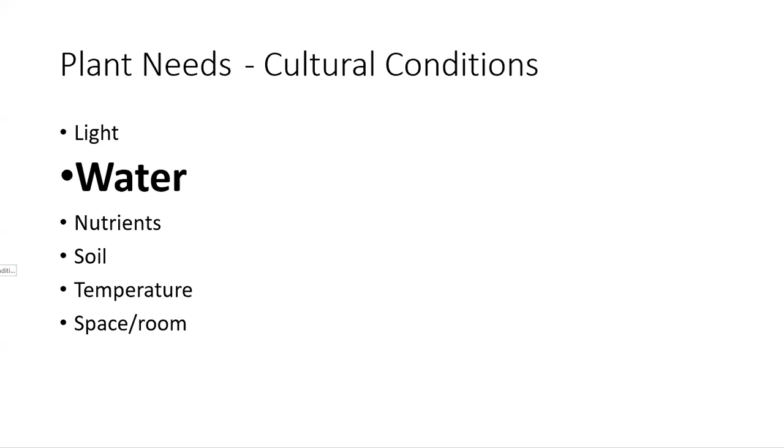So obviously, plants need water. If there is a native planting or a naturally occurring planting, those plants are adapted to the climatic conditions that they are in, and therefore they're also adapted to the amount of water that they receive naturally. So we've talked about Mediterranean plants, and there's California natives in their own respective independent regions within California in their own climatic areas. Once they're established, if they're in a planted landscape, they don't need supplemental water at that point.

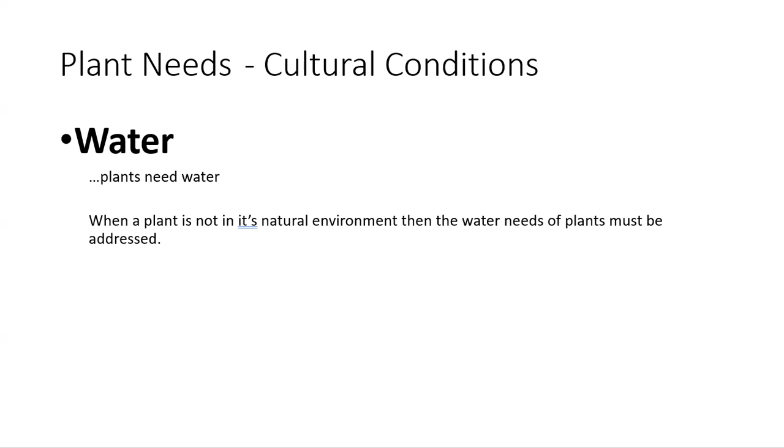If a plant is not in its natural location, if it's used in a landscape and it is not a native to that region, then it will typically need supplemental water to get established, as well as to continue to live and thrive. So how do we do that? Of course, we do it with irrigation.

So we're going to go through irrigation systems, irrigation terminology, hydrozoning. We're going to look at California water issues, soil water plant relationships, and irrigation system scheduling, which can tend to be a bit of a mystery for people. There is a really defined way to address irrigation scheduling, but it is sort of an area and a career all on its own.

There's lots of manufacturers out there. I don't have a preference for Hunter or Rain Bird or Irritrol or Toro or any of the companies. My opinion is whatever the best product is for the situation that you're dealing with, that is the one that you should use. But Hunter does have great videos on irrigation.

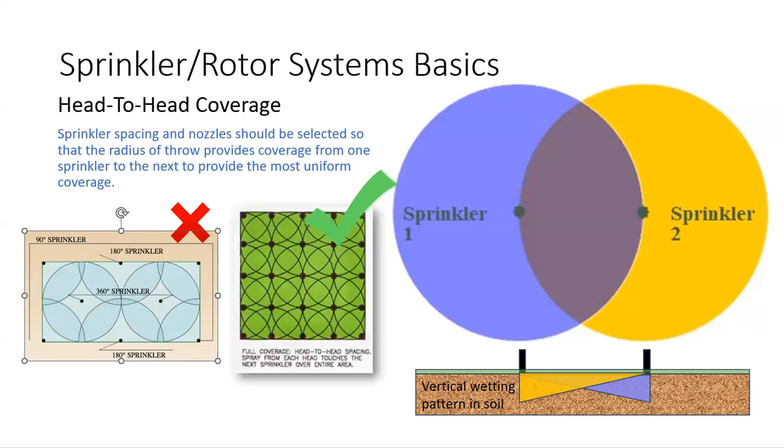Now, with this head-to-head coverage, there's a couple ways to achieve it. There's square spacing and there's triangular spacing. So square spacing is typically what we see on smaller areas, okay? And they can be really large areas. We see this installed in large lawns. The triangular spacing, you can see that it's just a little bit more efficient.

Okay, so in the square spacing, you see that you've got these overlap patterns here, right? So you have this overlap here, but this right here, from this sprinkler, the arc is 360 degrees. It's actually hitting 4 other sprinklers, but it's not getting close to this sprinkler, okay? Just because of the square spacing. Sprinklers throw a circular pattern, and so it can't make it all the way out to here.

If you switch to triangular spacing, you actually get much closer. So you get more uniform coverage, and so it's used in really large areas. But once you get close to any kind of straight line, you end up with a bit of an awkward wetting pattern, right? Because you'd need a sprinkler here, but the overspray would be a little bit awkward.

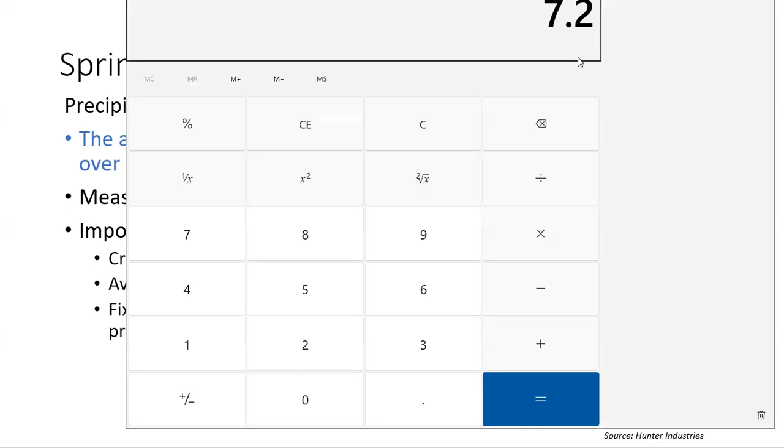So if we relate that to rain, in California in general, if in a 24-hour period we get 1 inch of rain, it's raining pretty hard. That's a heavy precipitation rate. If you relate that to a sprinkler, that's what sprinklers are replicating. And this is a pretty high precipitation rate compared to a heavy rain or downpour. With this sprinkler on for 24 hours at 0.3 inches, we multiply that by 24, that's equivalent to 7.2 inches in a 24-hour period.

So precipitation rate is really important to understand because we need to know how much water that system is putting into the ground. The really common question is, how much do I irrigate? I get this question a lot. What should I set my system to? How do I schedule my irrigation system? The answer is it depends on a ton of different factors that we'll get into in a couple minutes. But this is a very important one.

You have to know the precipitation rate of a system in order to accurately replace the amount of water the plant has lost through transpiration. Remember, we've talked about transpiration. Transpiration is measurable, and we'll get into how it's measured. You also have to replace the water lost from the soil through evaporation. The really key factor in that is understanding the precipitation rate.

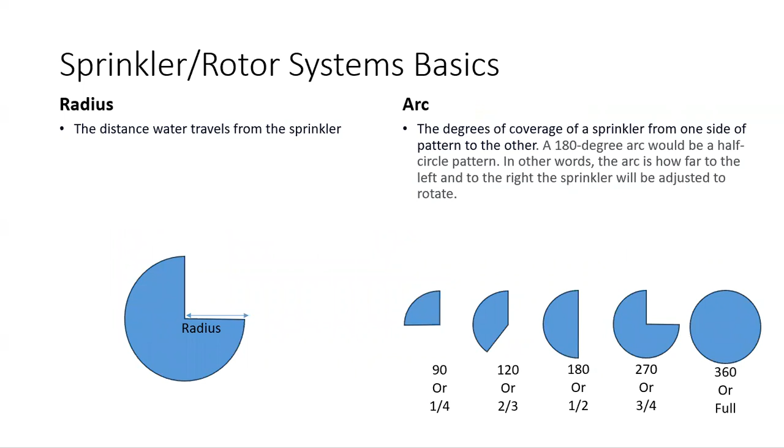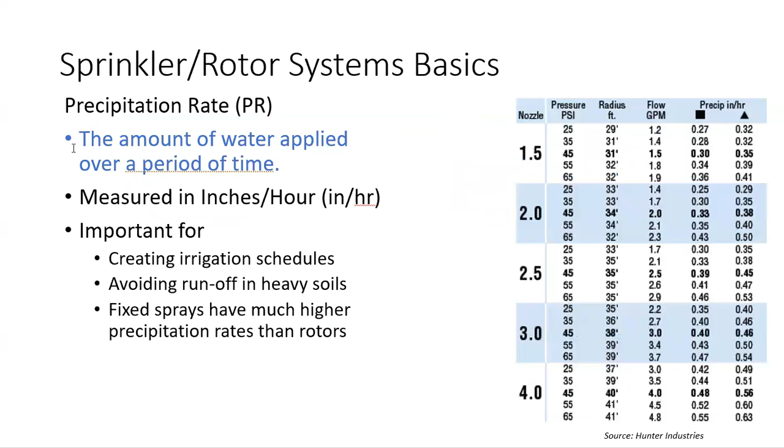Okay, so key terms: radius, arc, square spacing, triangular spacing, head-to-head coverage, precipitation rate, and match precipitation.

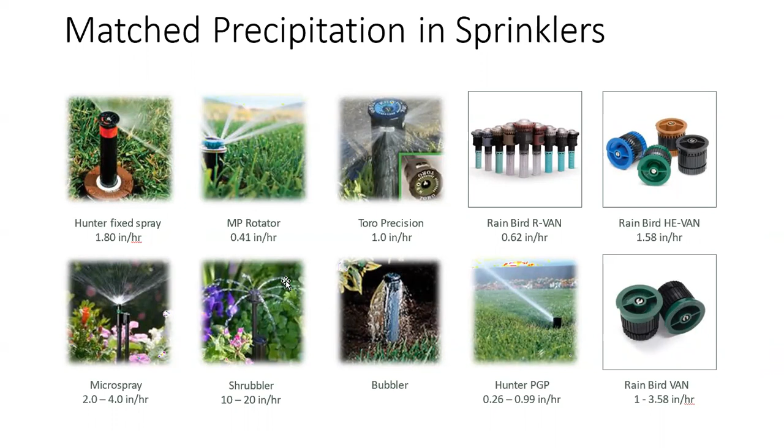that happens to this. Overspray is water that lands beyond the planted or irrigated area. When overspray lands on sidewalks, drives, or other hard surfaces, it can and does empty into the streets and local waterways. So both of these are not desirable whatsoever. Okay, these are typical issues associated with sprinkler systems, with systems that we throw water through the air to land in a desired area. But things aren't perfect, and so typically we have runoff and overspray.

Now, low volume systems, drip systems. Drip systems is a type of micro irrigation system that has the potential to save water by allowing water to drip slowly to the roots of plants, either from above the soil surface or buried below the surface. So in this case, you see we have an emitter that's on a poly tube, a drip line, okay? And this emitter acts like the nozzle. You select this emitter for the gallons per hour that it puts out, okay?

This one here, this one's called a point source system. This one's called an inline system. This one has built-in emitters, and we're gonna go through each one. So drip systems reduce overwatering. They avoid irrigation runoff. They apply water directly to the root zone. They minimize evaporation, and they can be line source or point source.

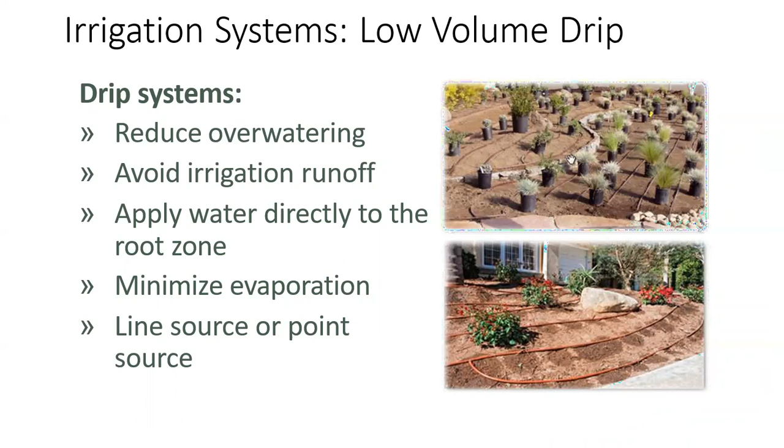So the difference, and you guys saw some of this in the video from Hunter, this is sort of the system that they go through, right? We've got a meter, a point of connection, a shutoff valve, a backflow prevention device, sometimes a pressure regulator if needed, a master valve, a valve, and in this case, it's going to a rotor system. So main line to valve becomes lateral line to a pop-up rotor, all the same from the same valve. In this case, it is a pop-up sprinkler system with MP rotators.

This right here is the drip system. Okay? And it's important to understand that with drip systems, we need a couple extra components. They're lower volume and lower pressure, and so we need to reduce the pressure downstream of the valve and have a filter, because the emission device that the water is actually going through, those are very small orifices. So anything that comes through this mainline system, any grit, any debris, etc., and it does, right?

If you've ever lost pressure or flow in like the bathroom or the kitchen sink faucet and unscrewed the nozzle on it, you can see built up stuff in there, right? Sometimes it's hard water buildup, but a lot of times there's just broken up debris in there. Water, stuff like that comes through our systems all the time, and it comes through our irrigation systems as well.

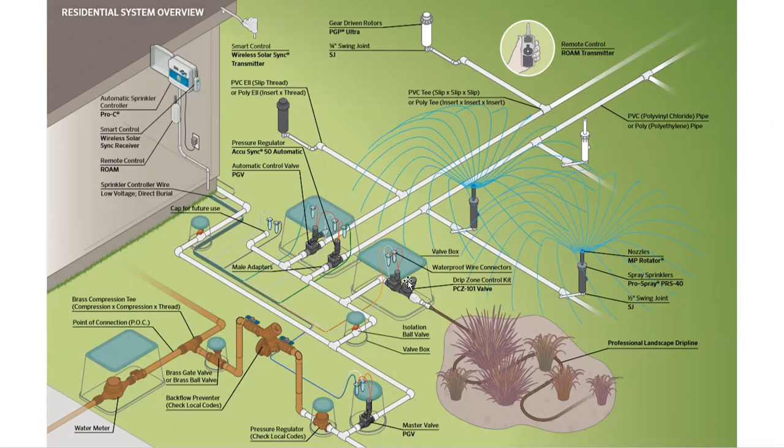So our point source drip systems, they're good for sparsely planted areas. So if you have a great distance between plants, it's good for that. It's very flexible. The challenges to it, though, are that there's lots of parts, and so lots of parts that can break. And it's very difficult to determine an actual precipitation rate, because each one of the emitters is putting out a certain gallons per hour in the area that it's dripping onto.

But it's very difficult to put this system together and then to be able to say this system puts down 1 inch of water per hour, okay, because of the high flexibility in the system, and that you can stick emitters anywhere, okay? Now, they're good systems, but again, the downfall to them are that there's lots of parts that can break, and it's very difficult to determine an actual precipitation rate. So scheduling it becomes very difficult.

Now, I put these pictures here, and you can see the actual layout. This is polytube. This is a 1/2 inch line, goes to 1/4 inch line, and then goes to the emitter. These are the pictures that you typically see in big box home improvement stores. Okay, we all know them, Home Depot and Lowe's.

And it's very misleading. Okay? I sort of think that they need to take these off of their pictures in their marketing material. You never put a system together like this. So first off, you see that this 1/4 inch tube comes off of the 1/2 inch line at an angle. You never want to do that, because if somebody steps on that, it's going to break. And you see this sort of popped up here and water dripping off, same thing.

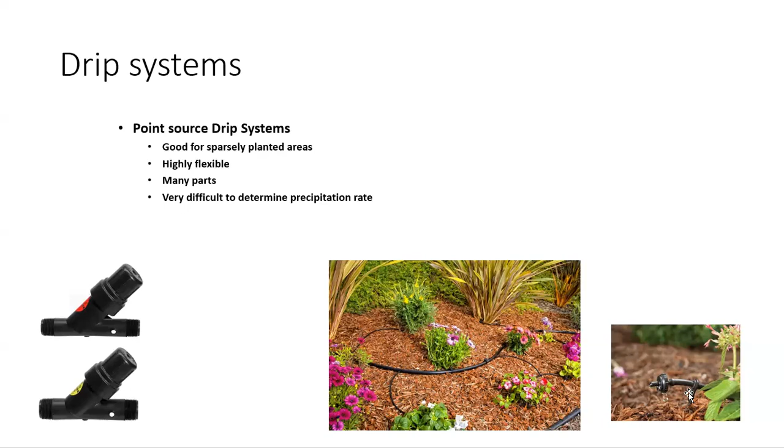You do not want this above grade. I think that they do this so that you can see how the system's put together, but this is the wrong way to do it. You need this drip line under the mulch. You need the 1/4 inch coming off of it parallel to the ground surface, and then these should be installed again under the mulch and not popped up at all. This is sort of a disaster waiting to happen.

Now, the other type of drip is an inline drip system. These are really good for all landscapes. You can use these on lawn as subsurface, as you can see in the diagram here. They are highly flexible. There's very few parts, and it's very easy to determine a precipitation rate.

Okay, so here, instead of an emitter or multiple emitters going to each plant itself, you uniformly irrigate the area with drip emitters that are built in at a certain inches on center, and the rows spaced at a certain inches on center. And what determines that is the type of soil. Right, so if we pop back to this, in a heavy clay soil, you would have further row spacing and further emitter spacing so that you have a lower precipitation rate.

With sandier soils, you'd have rows that are closer together and emitters that are closer together and higher flow rates because that soil can take the higher flow rate without saturation and runoff. Already went through all that. Perfect. So here you can see in this diagram,

so there's charts that you can follow here. So if you know the soil type you're working with and what you're actually irrigating, lawn or shrubs, ground covers, etc., it will tell you if you're irrigating shrubs and ground cover at grade, in a clay soil, you should use a 0.26 gallon per hour emitter inline tubing. The spacing on the emitters should be 18 inches.

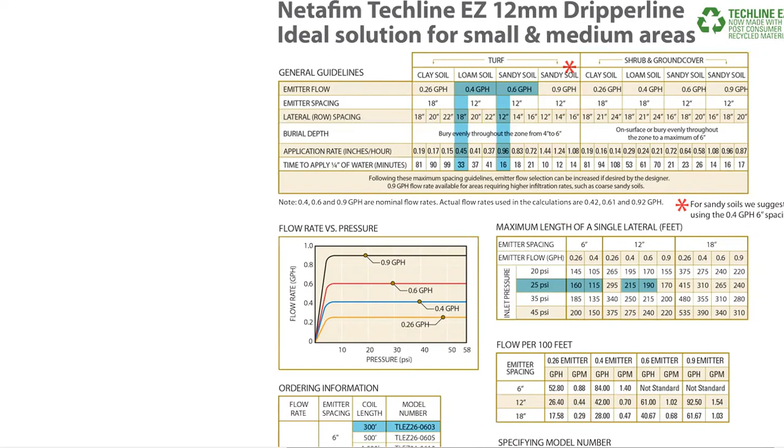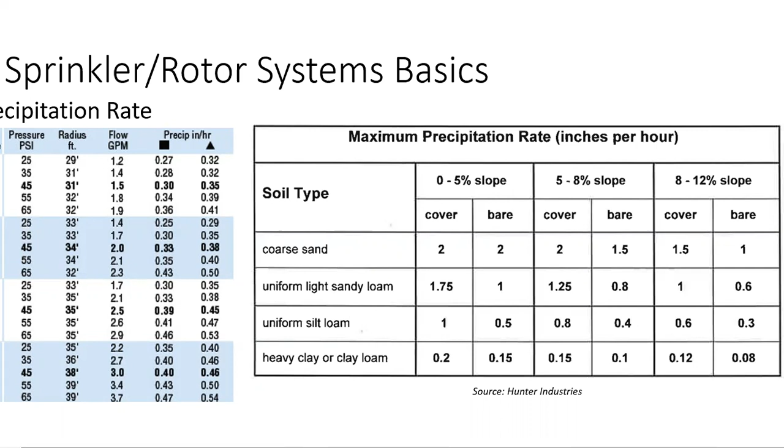The row spacing should be 18 inches. And therefore, your precipitation rate or application rate would be 0.19 inches per hour. And if we relate that back to our heavy clay soils, that 0.19 is a pretty good spot to be, right? Get back to normal here.

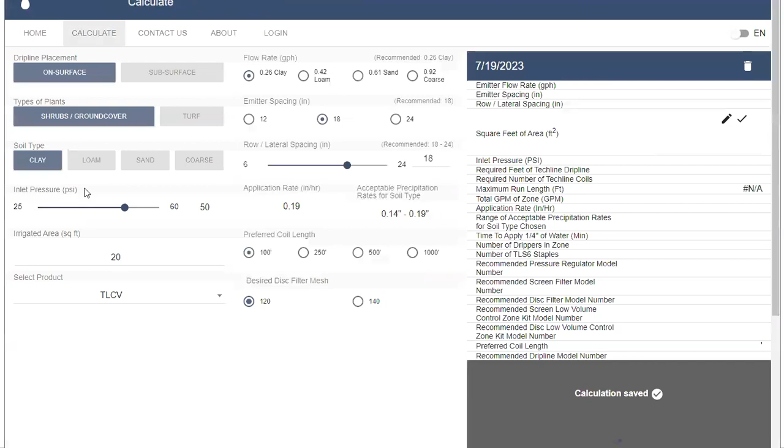Now, so there's charts for this, right? And you can see that using inline drip systems, you can get to a known condition. There's this calculator. Okay. Click on this. This is the link. I'm just going to bring it up. It brings you to Netafim's Techline calculator. Netafim is another irrigation manufacturer. If you go to calculate, so please do this, you can go through certain conditions.

So let's say that I have an on-surface system for shrubs or ground cover. I'm in a loam soil. My pressure, remember we have a pressure regulator, my inlet pressure is 30 PSI. My square footage is 500 square feet. Go ahead and just keep the Techline check valve. It's a certain product that they make. It's kind of the best one.

What it does when you put in all these conditions is it gives you the flow rate of the system that you need to use. Okay, it gives the flow rate. So each emitter puts down 0.42 gallons per hour. It's recommending that our emitter spacing is 18 inches on center. It's recommending that our row spacing is at 18 inches on center.

So if we zip this back to here, that would be our emitter spacing at 18 inches on center. So you can see that there. So along this line here, every 18 inches, there would be an emitter. The row spacing, so one drip line, next drip line. So the installed row spacing would be at 18 inches.

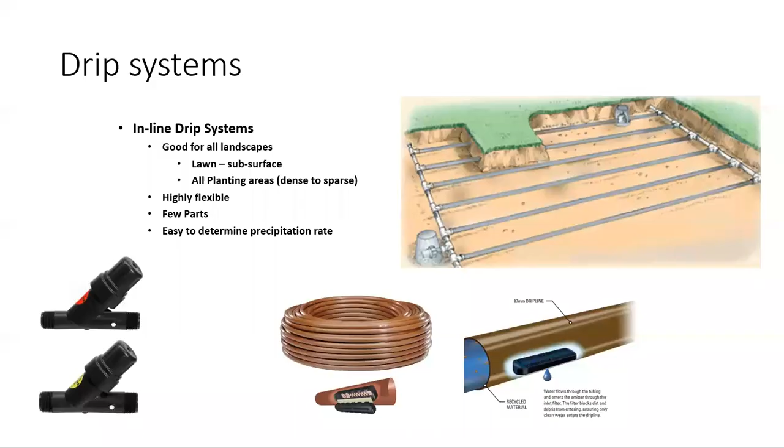You can get this product in 100-foot coils, 250-foot coils, 500-foot coils, 1,000-foot coils, and then it's telling us some other stuff which you guys don't need to be that concerned with right now. The other nice thing that it does tell us is that the time to apply a 1/4 inch of water is 50 minutes. The other thing that it tells us by going through this is through that system, what the flow rate is. Okay, so going through that lateral line to the first emitter is going to be 1.55 gallons per minute.

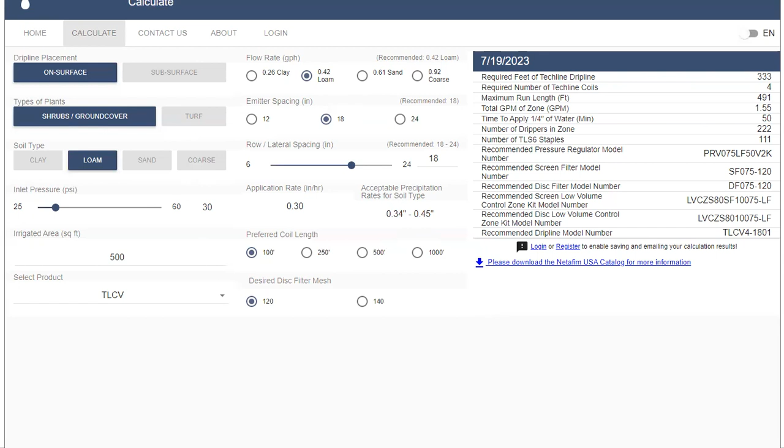Okay, now that's an important thing to know for irrigation design, because then you can determine what the pressure losses are. But again, you really need to take the irrigation design class to really understand what that means. But there are these calculators out here for this sort of thing. So this is how you use them. And this right here is the link to get there.

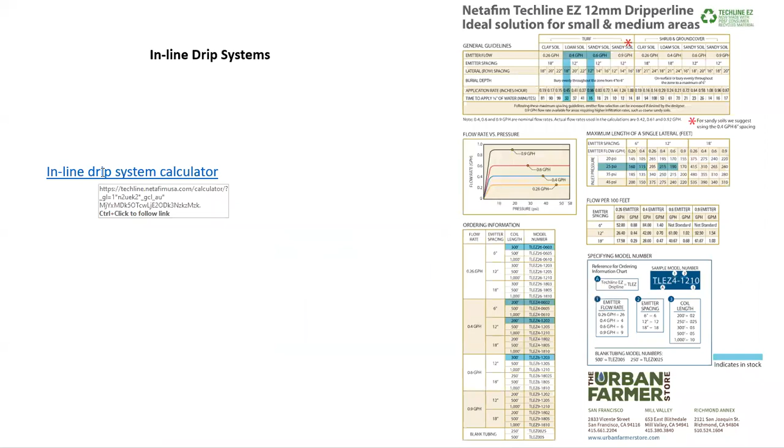Now, irrigation audits, it was mentioned earlier, an irrigation audit is used to collect and provide information about a current and planned irrigation system operation and overall condition of the system. So by design, these systems operate in a certain way. In reality, they're always a little bit different. So we use irrigation audits to figure out what actual precipitation rates are.

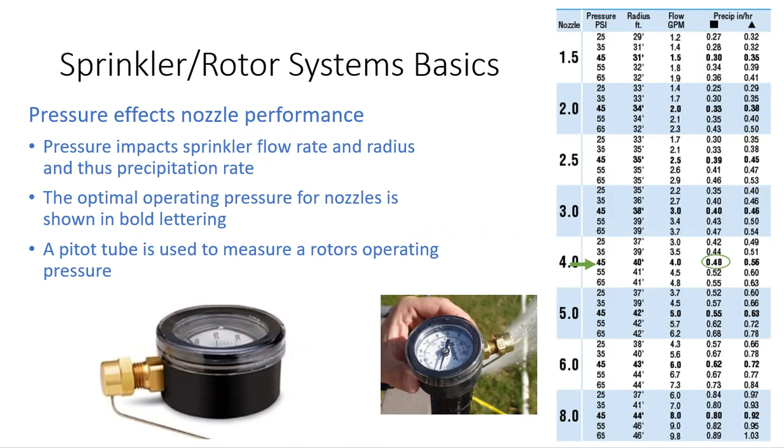Okay. This is a picture of somebody doing a catch can test where you lay out a bunch of, they're called catch cans. This is what they look like. And they run the system for a certain period of time. They measure the amount of water that falls into the catch cans, do some calculations, and from our irrigation charts, it tells us it should be about 0.48 inches per hour under these conditions. But again, the reality of it is it's going to be a little bit different. So irrigation audits are very, very helpful to be able to figure out exactly what the uniformity of the system is and the precipitation rate is.

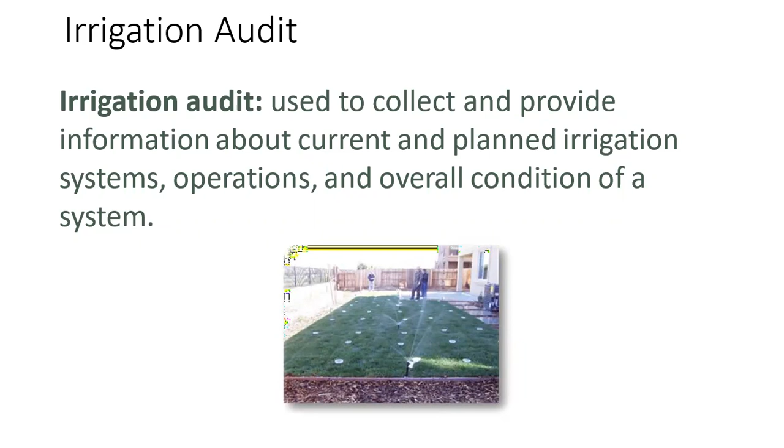So these include a visual inspection, an evaluation of the distribution uniformity, so how well that system performs. So if it's not perfect head-to-head coverage and not matched precipitation rate, then the distribution uniformity is going to be really low. It's going to be poor distribution uniformity. With the irrigation audit, this is one of the most important things, the actual precipitation rate. You can also determine the landscape's watering needs. We'll go into that. And then we use it to review and develop an irrigation schedule.

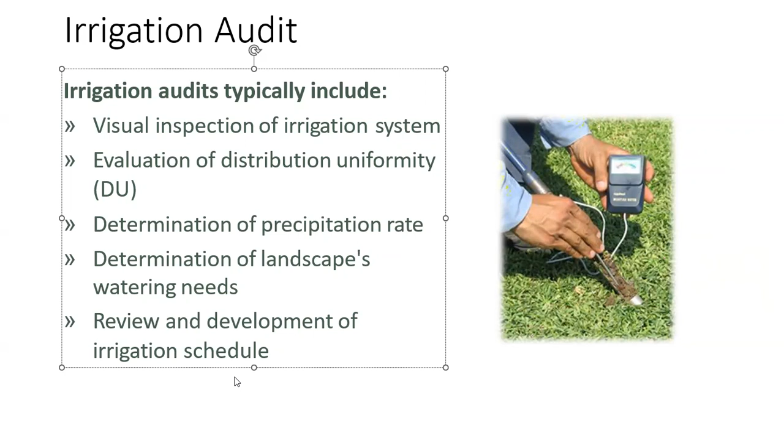Biannual audits are recommended, and with some projects, some landscapes, it is required. And it is a requirement for a certified landscape for certain projects to get final inspection. There are projects that require an irrigation audit. Now, the audits need to be conducted in a manner consistent with the Irrigation Association Landscape Irrigation Auditor Certification Program or another US EPA WaterSense labeled auditing program. QWEL is one of those, Qualified Water Efficient Landscaper.

These are programs and exams that you can take to become a certified landscape irrigation auditor. This is a great certification to have. I do irrigation audits frequently, and they're going to be required more and more. So if you're interested in this, look into these programs, but also understand that Hort 110, the irrigation design class, really helps to gear you towards that and understand it.

So the thing we're trying to figure out with an irrigation audit is the distribution uniformity. This is a measure of how uniformly water is applied to the area being watered. It actually expresses a ratio or a decimal to avoid confusing it with efficiency. Okay? And again, in Hort 110 we'll get more in depth on this stuff, but typically it's expressed as 0.81 or 0.75, as opposed to 75% or 81%, et cetera.

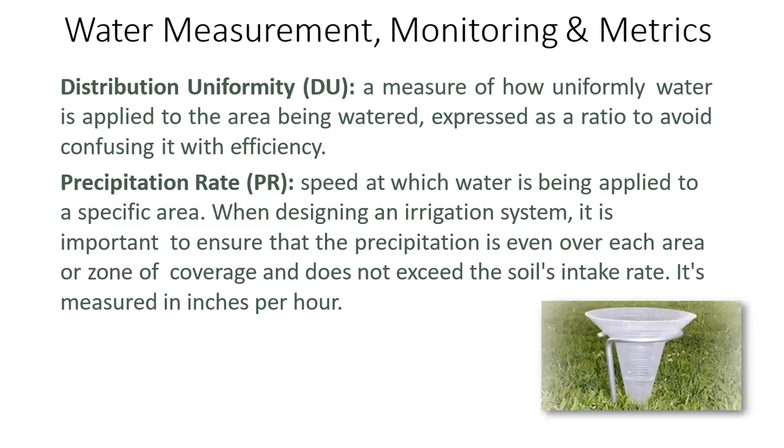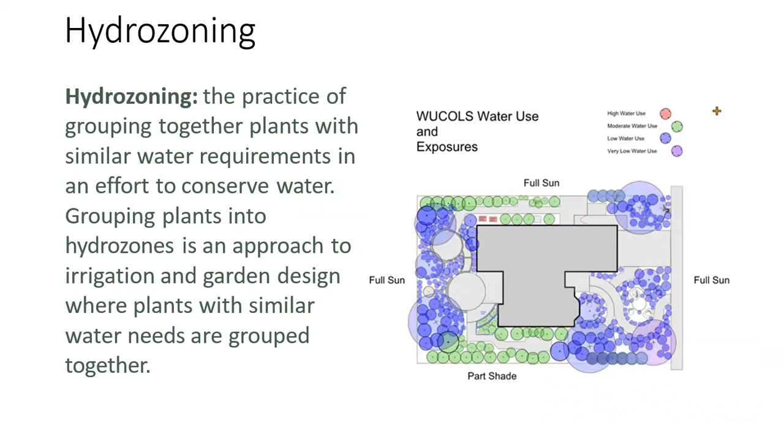Okay, now with hydrozoning, it's important to group plants with the same water needs into the same areas. That way you can irrigate them to what they need under that same valve. So you really take this hydrozone, right? This would be a hydrozone. This right here would be a hydrozone. This right here would be a hydrozone. And you develop a valve zone.

Okay, so this number 5 zone covers this area. These are all low water use plants, so they need a certain amount of water. These moderate water use plants are zoned together in zone 4 and 3, and they need a certain amount of water. The reason that this zone 4 and zone 3 are irrigated separately is because they're under separate sun exposures.

Okay, so a moderate water use plant under full sun is going to have higher water needs because it's in full sun. Those same plants in part shade would need less water because they're going to transpire slowly and there's going to be less evaporation. Okay, so you separate these because ultimately this is going to need longer run times or more applied water than this. Okay, and these are isolated into hydrozones.

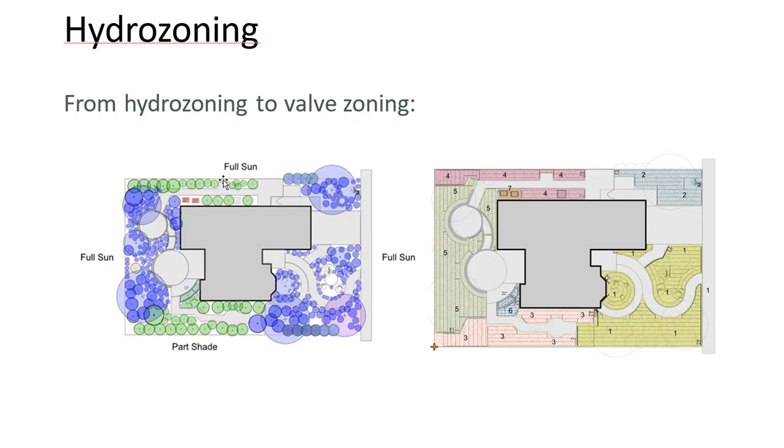If we mix these, right, if we have high water use plants with low water use plants, and we have a certain irrigation system, then we're going to end up over irrigating our low water use plants in order to provide enough water to the high water use plants that are in that same area irrigated by the same system. Okay, so hydrozoning is very important. The way that we do this is by grouping the same plant water use characteristics with similar and isolating different solar exposure zones.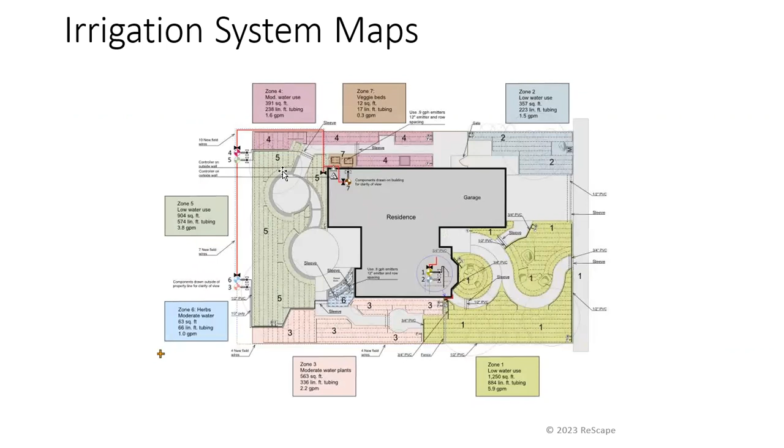This right here is the actual irrigation design for this. So you see we have red main line going to valves, going to lateral lines, and then irrigating the areas. Factors to consider when you're hydrozoning: the slope, sun or wind exposure, plants in ground versus pots. It's very bad to irrigate pots and in-ground plants at the same time on the same system because plants in pots lose water faster than plants that are in the ground.

Considering the water needs of the plant, the soil type, new versus existing plantings, and available zones on the controller. Now, in my opinion, I would replace the controller. If you're limited on the number of zones on the controller, replace the controller to get more zones.

On to California. Okay, and water issues in California. If we look at water in California, overall, we have this as a pie chart breakdown. So I'm going to zoom in on that a little bit. Oops. So if we look at this, it's kind of interesting. We have different water uses for all the water that is capturable in California. We see that there's almost a 50-50 split here, right? If we look at this line.

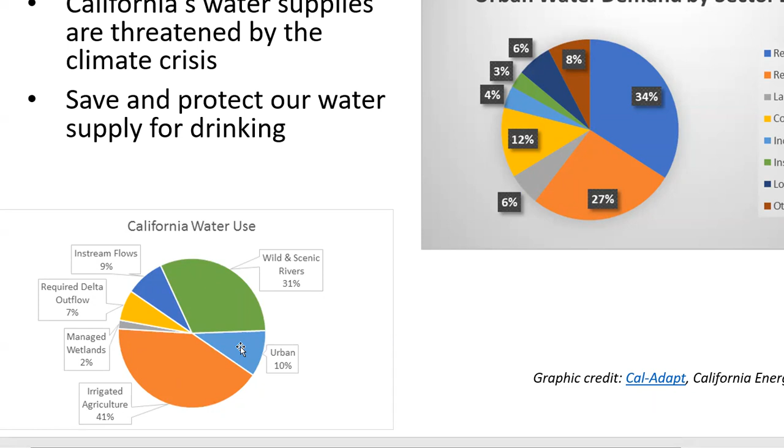So 50% of the capturable water in California goes to the environment through managed wetlands, outflow, in-stream flows, and wild and scenic rivers. The other 50% goes to irrigated agriculture and urban water use. Okay, so 41% goes to agriculture, 10% goes to urban water use.

Now, if we dive into what urban water use is, there's residential indoor water use and residential outdoor water use. Large landscapes, commercial, industrial, institutional. Of course, there's always losses, and then there's some other, right? But if we look at this pie chart, a hugely significant portion of it goes to landscape, right? So of this urban 10%, a significant portion goes to landscapes.

And if we look at residential, right, 50% of the water goes to residential indoor use, 50% goes to residential outdoor water use. That's a pretty good split right there, a pretty accurate split. That being said, we have water issues in California. Okay, there's not enough water for the amount of people.

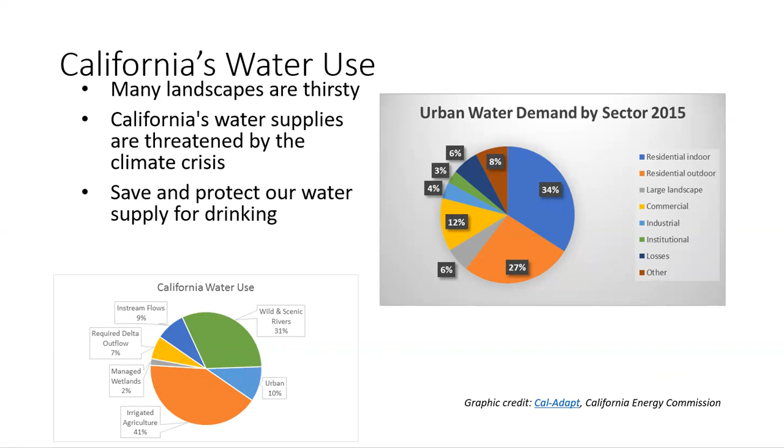So we need to be very efficient with our outdoor water use, because ultimately we still have to drink water and we still have to shower and wash dishes and clothes, etc. That's not going anywhere. We can get more efficient with that. But in the outdoor, it's very important that we're very efficient with our irrigation.

This is just a breakdown of sort of where California's urban water goes. Okay. A third of all California water goes to urban landscapes. A little less than 2% of all of California's energy goes to treating, moving water to urban landscapes. So this right here shows various water uses throughout the different regions of California.

But one thing that is really important to understand is that with water use in California, there's also energy that's needed in order to get that water to our systems. Okay, so electricity is used for that. Carbon emissions are put out in order to do that.

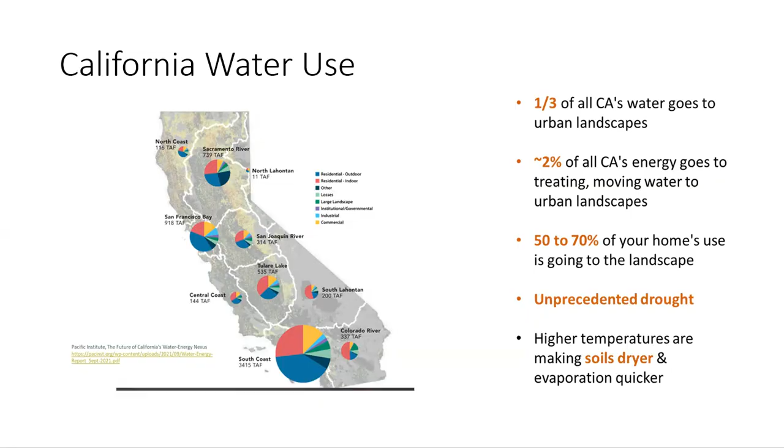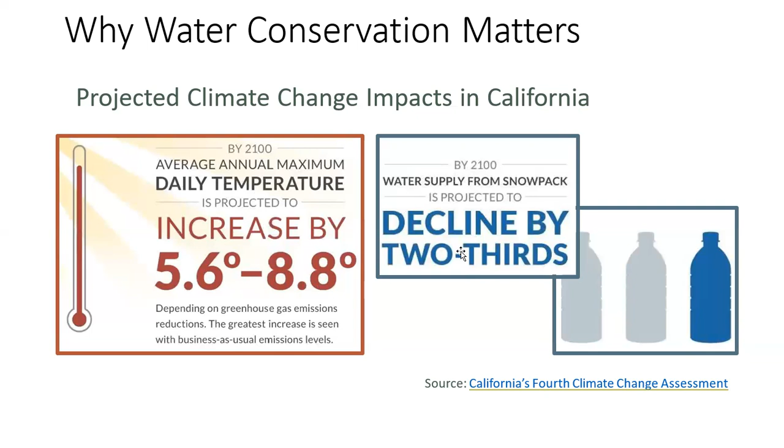Projected climate change impacts in California: by 2100, average annual maximum daily temperatures are projected to increase by 5.6 to 8.8 degrees. By 2100, our water supply from snowpack is projected to decline by 2/3. Okay, so very important to ready ourselves for this and to be working with incredibly efficient irrigation systems.

Water conservation is equivalent to energy conservation. So 19% of California electrical energy is used for water. 16% of this energy is for urban water conveyance and treatment of water. This doesn't include heating water, in-building distribution, or wastewater treatment. So 1.15% of California electrical energy is attributed to landscape water use. So really, water conservation is energy conservation. It's really important to make that connection.

So when my teenager is trying to warm up the water in the shower and he's just letting it flow before he gets in, I used to say you're wasting water. Now I say you're wasting water and energy. Okay, very important to make that connection.

So now we're getting into soil and plant water needs. Basic relationships between soil, water, and plants. There's spaces between those soil particles. We've talked about that. They contain water, which moves upward through plants. That water cools the plants as it evaporates off the leaves and other tissues. That water carries essential nutrients into the plants and helps maintain cell size, right? Turgidity, so that plants don't wilt.

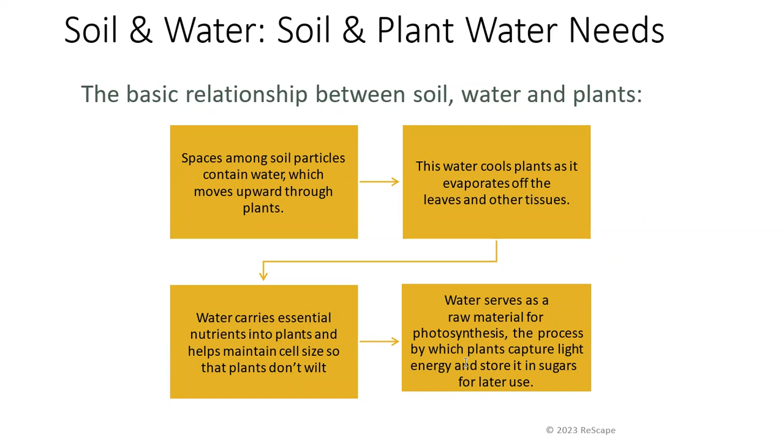Water serves as a raw material for photosynthesis, the process by which plants capture light energy and store it in sugars for later use. Okay, we've talked about that, but plants need water. Now, we can do things to improve our soils and improve the amount of water that's available or storable in those soils. A robust living soil with sufficient organic content is the foundation of a water-conserving landscape. 1 cubic foot of soil holds roughly 1 quart of water for each 1% of organic matter. Remember, as we increase organic matter in soils, our water holding capacities go up.

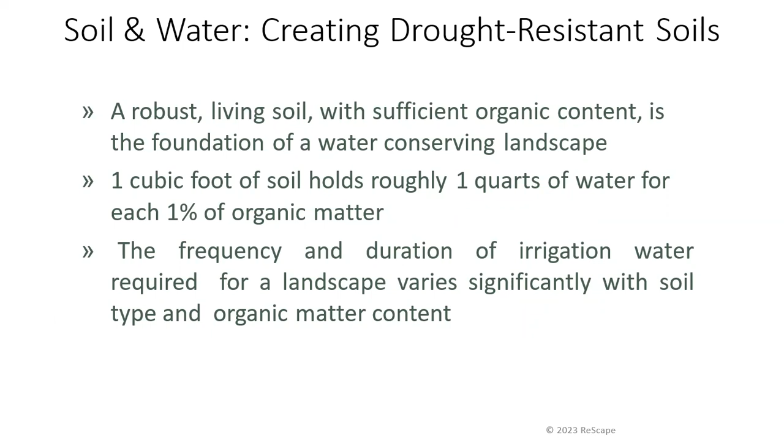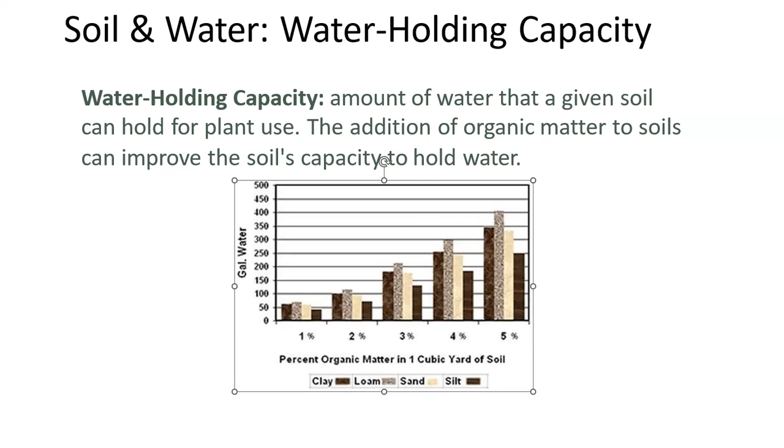So this helps us to decide when to irrigate. Okay, this is important to understand. Plants withdraw soil moisture to meet their evapotranspiration demands based on weather conditions and the plant traits. So plants will constantly pull water out of the soil. That's how they stay up and alive. And as water is depleted from soils, it becomes more and more difficult for those plants to withdraw water from that soil.

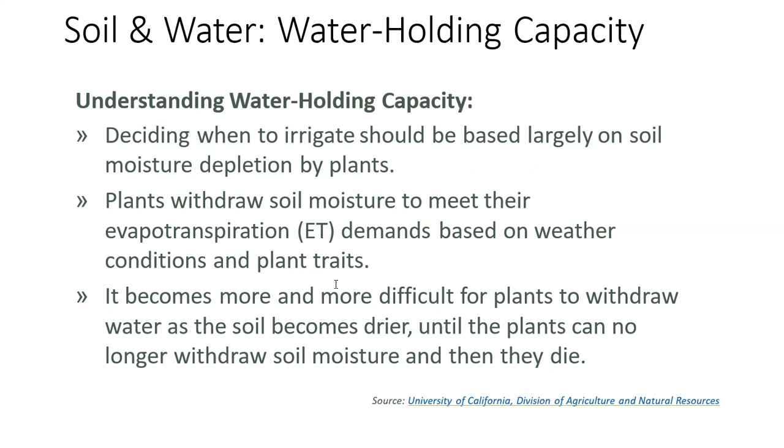Soils that can store larger amounts of plant available water do not need to be irrigated as frequently as soils that store smaller amounts. In general, sandier soils need to be irrigated more frequently than heavier textured soils with a greater clay content. A given plant will use water at the same rate regardless of soil texture, but it will run out of water sooner in a sandier textured soil. That statement is important to understand. If you have a plant that can handle being in clay soil or sandy soil, it will use water at the same rate. But in the sandier soil, it'll run out of water faster.

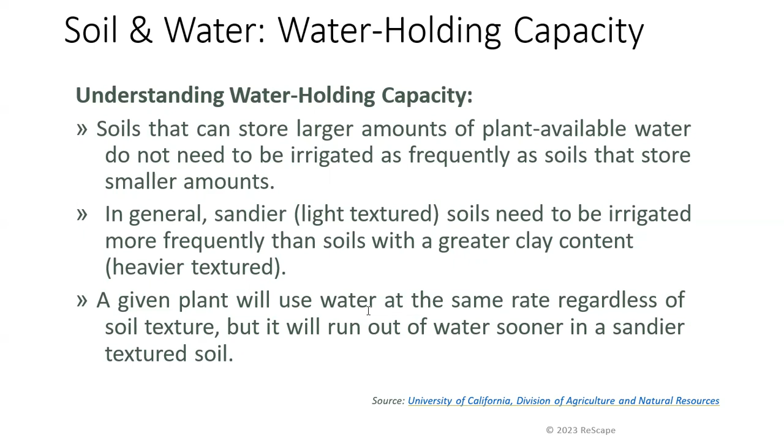This is that same graphic. How quickly a soil can absorb water will help to determine what kind of irrigation to set up. So understanding your soil is a very important aspect of selecting, designing and installing an irrigation system, because you need to understand what the precipitation rate is. Using high precipitation rates in sandy soils is acceptable. High precipitation rates in clay soils is very challenging.

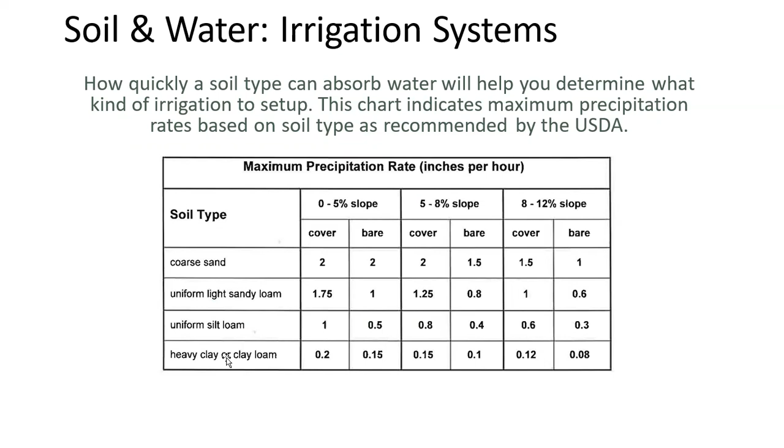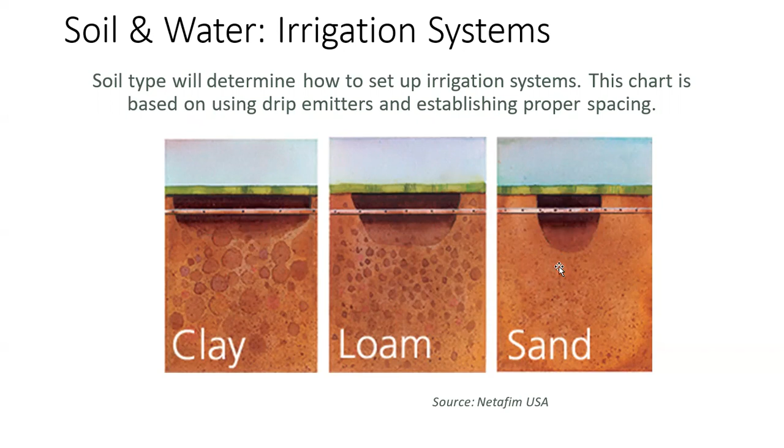And this is why. Okay, soil type will determine how to set up the irrigation systems. This chart is based on using drip emitters and establishing proper spacing. So the wetting pattern in clay soil goes far out away from those emitters and down very slowly. Sandier soils, on the other hand, water spreads out in a narrow column but goes deep quickly. And so that's just a graphic example of that.

On to irrigation scheduling. So the concept: an irrigation schedule should determine the duration or the runtime, how long the system will run for, and the frequency, how often that system should irrigate. The variable components that we need to understand are weather, the plant water use, the system uniformity, and the application rate. So we're going to go through how to determine the weather factor and how to determine the plant use factor. We've already talked about the system uniformity that can be determined through an irrigation audit.

And essentially, it just says how good is your system? How efficient is it? How uniform does it put water down? And then that system application rate is the precipitation rate. Okay, so we've already talked about these two things. We're going to go into the weather and the plant water use. The weather portion. The way that the weather is addressed in terms of irrigation scheduling is called evapotranspiration.

Evapotranspiration, also referred to as ET, is the process of transferring moisture from the earth into the atmosphere. Evaporation occurs when water vapor leaves soils or plant surface. So evaporation, when water leaves the soil as water vapor. And if there's water on plants, it can evaporate off of the surface. Transpiration involves the passage of water through the plant, right? We've talked about that. That happens during photosynthesis. The combination of those two things is called evapotranspiration.

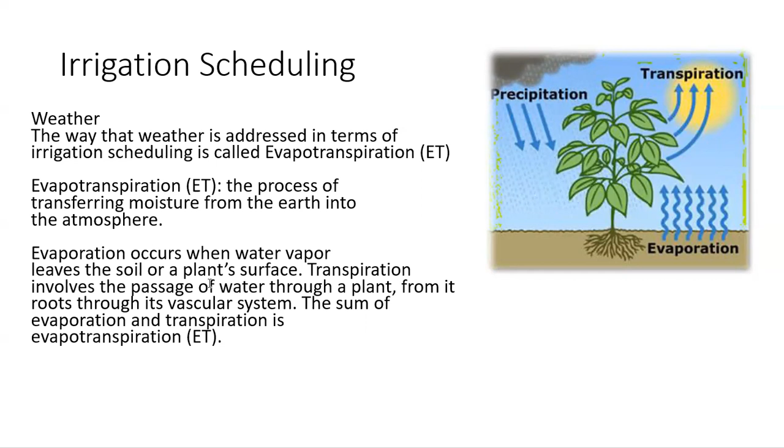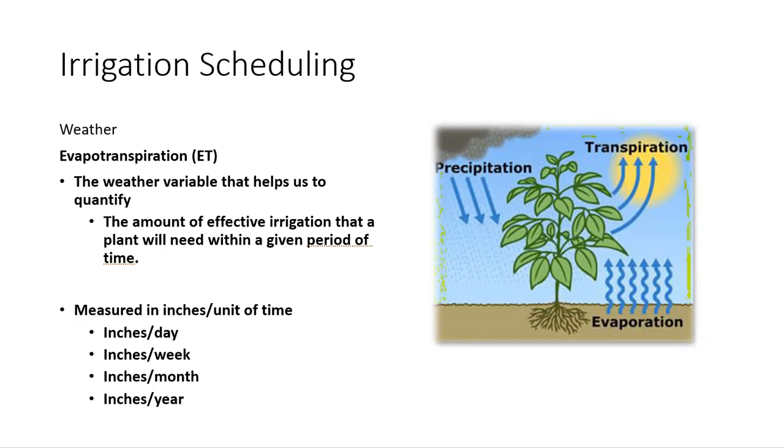And when we're irrigating, that is what we are replacing as it relates to that plant water use. But we need to know what the evapotranspiration rate is in order to understand how much water we need to replace via irrigation. So this is the weather variable that helps us to quantify the amount of effective irrigation that a plant will need within a given period of time. It's measured just like the precipitation rate in inches per unit of time, inches per day, inches per week, inches per month, inches per year. And you can figure it out to the inches per hour if you want, but that's a little bit too nitty gritty. The way that we figure this out is through the CIMIS program.

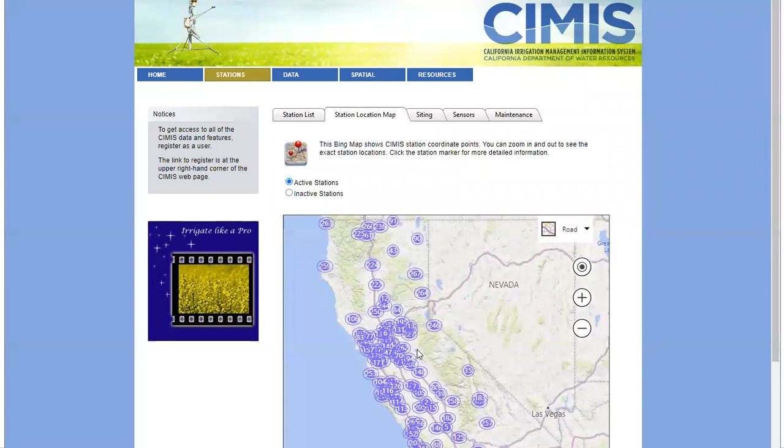California has a statewide system of computer-operated weather stations that generate what is known as real-time evapotranspiration, the reference evapotranspiration rate. And this is a link to that. When you go on to it, this is what it looks like. So you can go to stations. And I like to go to station location map. And I like to zoom in. Here's the one that is closest to us. Station 131 is Fair Oaks. Now I can go into data. And I can drill down to station 131, select it. I'm going to select a limited monthly report. And I'm going to run that report.

And we can see that in June of 2023, the evapotranspiration rate was 6.94 inches in June. So if we relate that, 30 days in June, 6.94 inches divided by 30 days, that's 0.23 inches of water lost through evapotranspiration per day in a high water use crop. Okay? In a high water use crop.

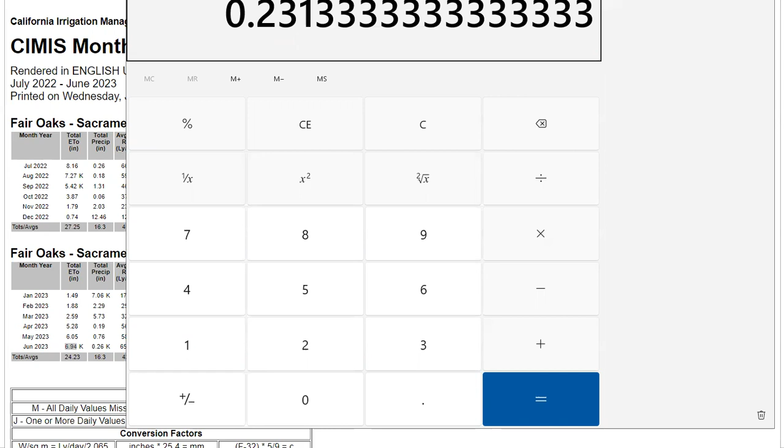Here, this one was the same thing. This one was a different station. This one was at Point San Pedro. In July of 2022, 6.32 inches were lost. There's 31 days in July. 6.32 divided by 31 gives us 0.2 inches per day. 0.2 inches per day times 7 is 1.4 inches per week. And that's for a reference evapotranspiration rate of 100%.

Okay. So the way that they actually do this is they put a CIMIS station. So let's dive into that. Our CIMIS stations look like this. They take a station, they take a bunch of sensors and they put it on a 400 square foot area in full sun with very healthy, well irrigated, high water use lawn. And in that location, they measure how much water vapor is coming off of that. And that sets the 100% mark, right? So it tells us how much water is coming off of that in full sun on a high water use plant area kept in really good condition. So that sets the bar for what a high water use area needs in terms of replacement irrigation water.

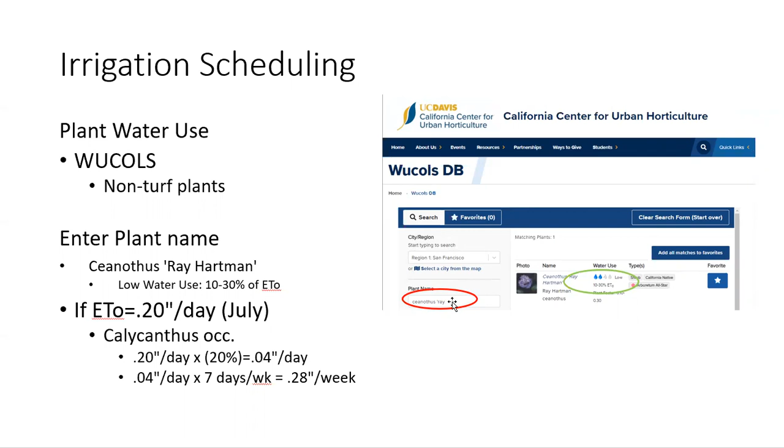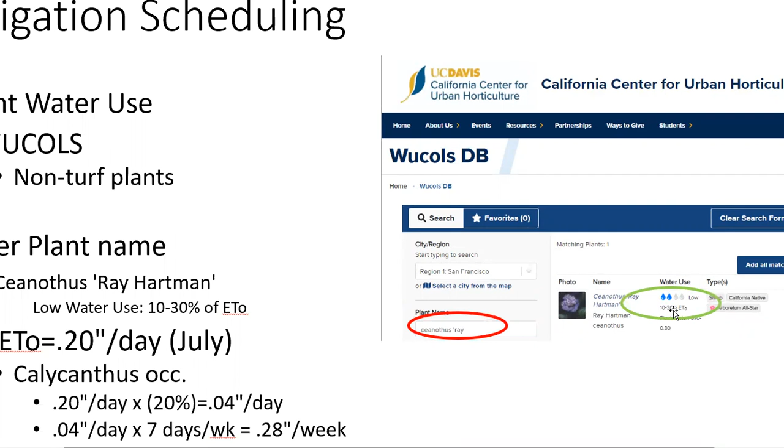Here, we go into WUCOLS and we looked up a certain type of plant, Ceanothus 'Ray Hartman'. And we see that this is Ray Hartman. Most Ceanothuses are low water use, and so it's 10 to 30% of reference evapotranspiration. So if we relate this back to this condition, where in a high water use area, we need to put down 0.2 inches per day, right?

On the lawn in full sun, in whatever region you're in, you've got to put down the appropriate amount of replacement water. So in this case, it was 0.2 inches per day. Well, with a low water use plant, with the 0.2 inches of water per day, if we only do 20% of that, we would be putting down 0.04 inches of water per day.

Okay. Now, the way that we determine that, again, is to go into WUCOLS. So I'm going to dive into WUCOLS for you. And we click on Plant Search Database. We select a city, Sacramento. Let's select a plant and let's do Chondropetalum tectorum. Chondropetalum tectorum is a low water use plant, so it would need 10 to 30% of reference evapotranspiration

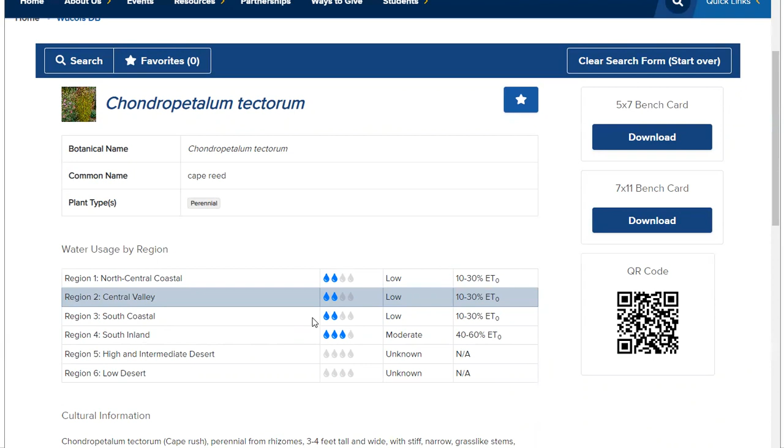So North Central Coast is going to have a lower evapotranspiration rate than the Central Valley. You can see here that South Inland, essentially like the Inland Empire, this same plant has a moderate water use. It's going to use more water in that region. Okay, so region by region, we have certain plants that use more or less water.

For other plants, so our Hydrangea macrophylla, our big leaf hydrangea. On the North Central Coast, the water use classification is moderate, but in the Central Valley, it's high because it's hotter in the Central Valley. Okay? So very important to make that connection.

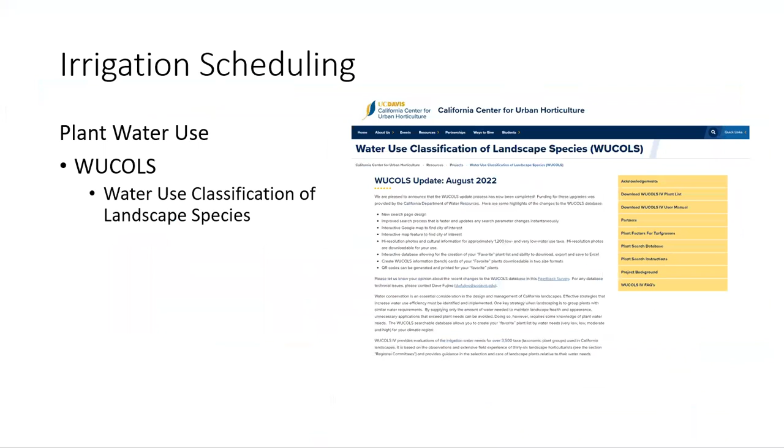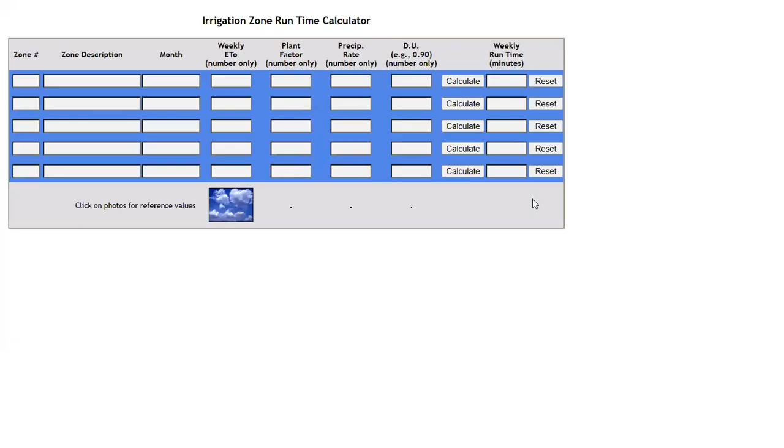Now, again, take Hort 110 irrigation design to really dive deeply into this, but there's apps for everything. Here's a couple links. So this link will take you to Water Wonk, and the nice thing is, lawn, month is July. ETo weekly, 1.4 inches of water. The plant factor, it is lawn, so the plant factor is going to be high. It's going to be 0.9.

Our precipitation rate, let's say we're using MP rotators. So our precipitation rate is assumed to be 0.41 inches per hour. Our distribution uniformity, again, to figure that out, you really need to do an irrigation audit, but let's just say that it's a sprinkler system. So typically those sprinkler systems' uniformity is about 0.75, if that. Click calculate. Runtime per week is 245 minutes. We take that 245 minutes, we divide it by 7. It needs to run for 35 minutes every single day.

Now, on that same site, maybe we have low water planting. July. ET rate's the same, right? It's the weather. That doesn't change. But our plant factor based on WUCOLS and our hydrozoning is 0.2. The precipitation rate, let's say that we're using Netafim. And so our precipitation rate is 0.3 inches per hour,

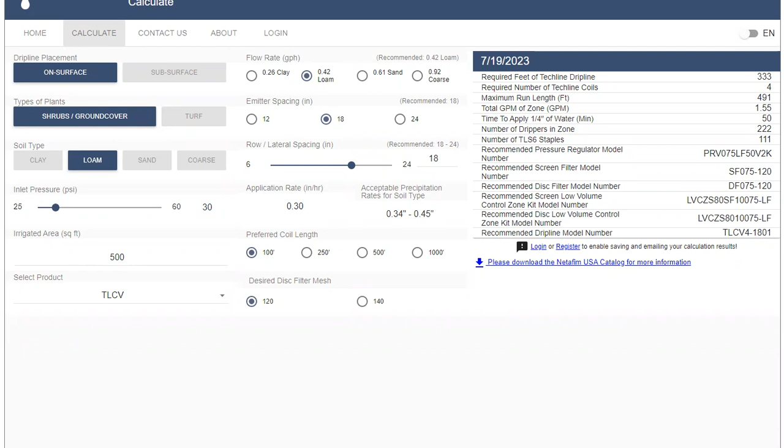which is pretty similar to the 0.3. Well, let's actually just say that we're irrigating with MP rotators as well, which you actually shouldn't do, but just for equal comparison. And our distribution uniformity is the same. Click calculate, right? So same location, different plant factor, same precipitation rate, same distribution uniformity.

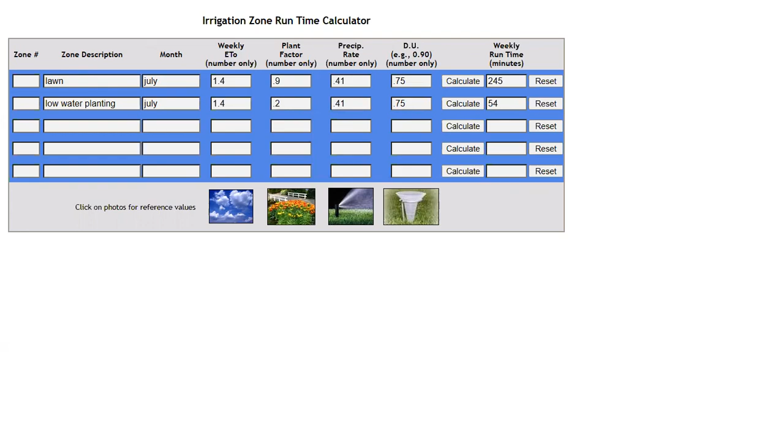This only needs to run for 54 minutes per week, right? So we don't need to run that for 35 minutes a day. We run that for 7-8 minutes per day. Okay? So that's how you conserve water in landscapes. And this stuff is all 100% available to you and free. CIMIS, figure out what the weather factor is. WUCOLS, figure out what the plant factor is.

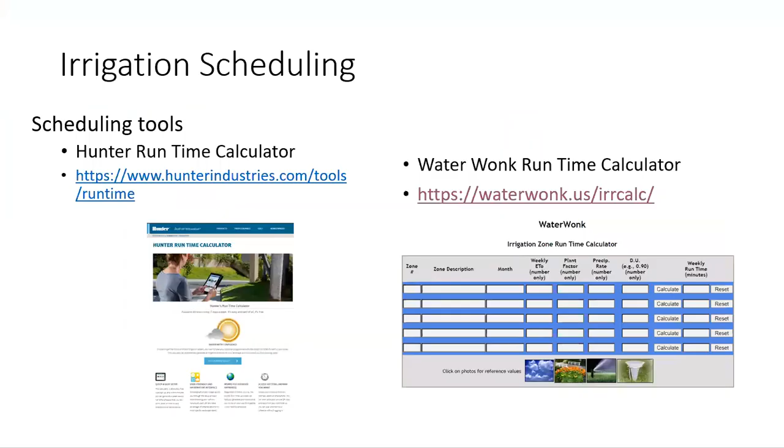So all that being said, irrigation has always been a great area of horticulture to go into, but especially now and literally as time moves on, for hundreds of years, right? Well beyond our lifetime, the irrigation industry portion of horticulture is going nowhere, and there's going to be more and more jobs. There's very few people that effectively go into this.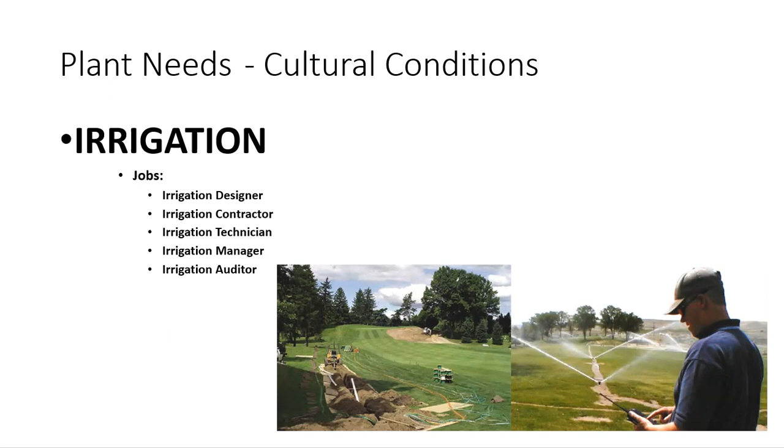You can become an irrigation designer, an irrigation contractor, an irrigation technician, irrigation manager, irrigation auditor. There's a lot of money to be made in a career through irrigation. Okay. So if you are the type of person that loves plants, loves horticulture, and you have a decent mind for math and some technical aspects, this is a great area of horticulture to go into. So that's it. Plant cultural conditions, water, we replace it with irrigation, and it's a very important aspect of horticulture.